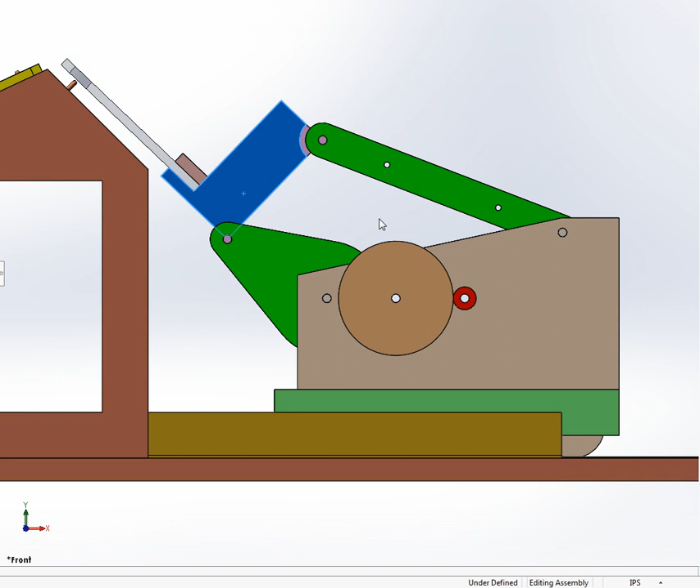So we're going to talk about how to create this. Again, you're going to create your own concept. It doesn't have to look like this. But you'll notice that this one does have a two-stage reduction here. And if you had one motor on this side, then you need to have an axle going across to drive the pinion on the low torque side on both sides.

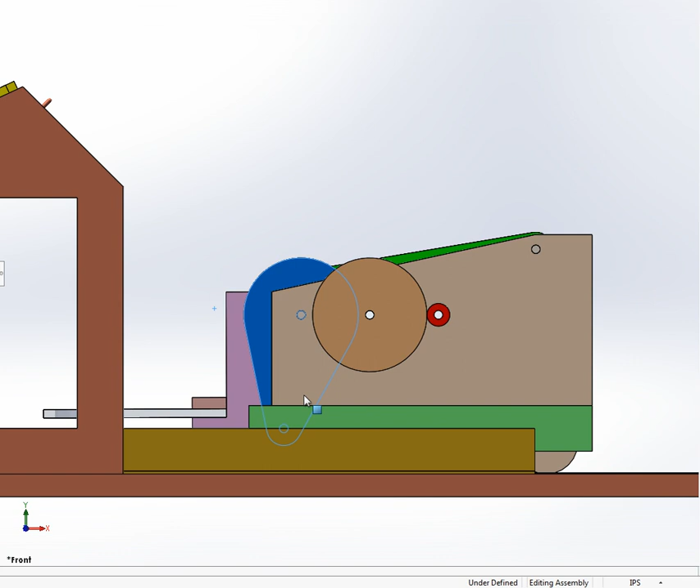Or you can see there's a lot of room in here, even when this is down in this position, so you can see that there's still quite a bit of clearance in there. If you wanted to put a brace, stiffen these two arms up structurally, then you could just drive the motor on one side. That'll be up to you, or use a different way.

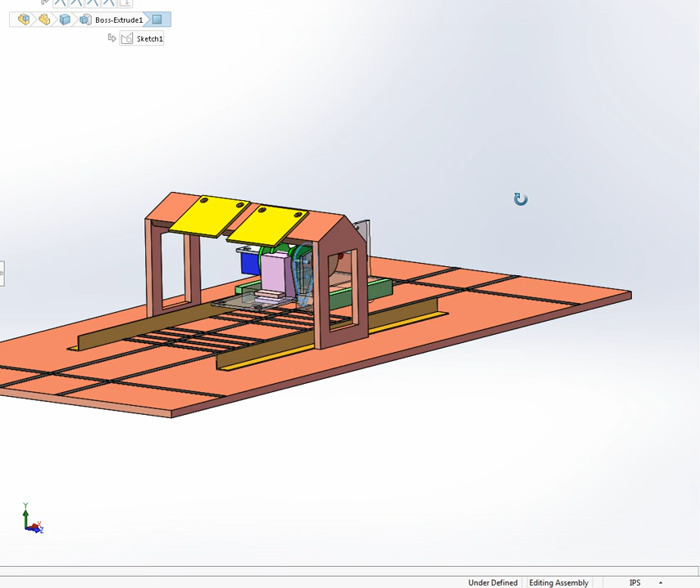But one of the things that will be required in this project is that you only use 4 actuators. So you can use 2 actuators to drive each side of the base, or 1 actuator for each side. And then you can use an actuator to drive the 4-bar and an actuator to drive the grabbing mechanism. So you have to carefully design the 4-bar, because you're not going to have another actuator to, say, tilt the jaw separately.

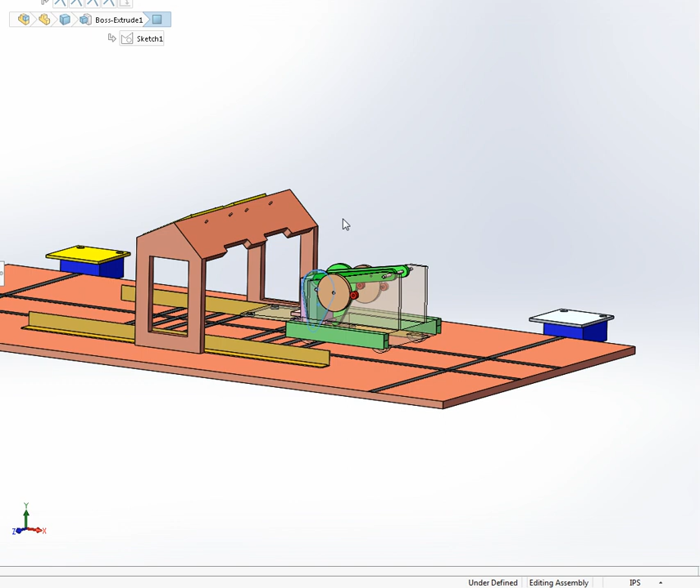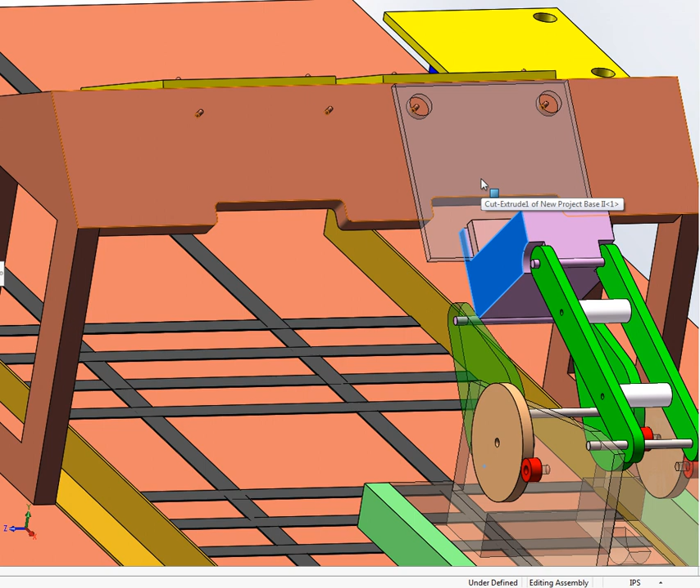You also notice that there are these tabs just to give you a little extra room in here, right? So there's enough on the edge here to catch the plate so it doesn't fall off, but where your jaw is actually interacting, if you want to have a bigger jaw, there'll be room in there. So now the other side is a little bit trickier.

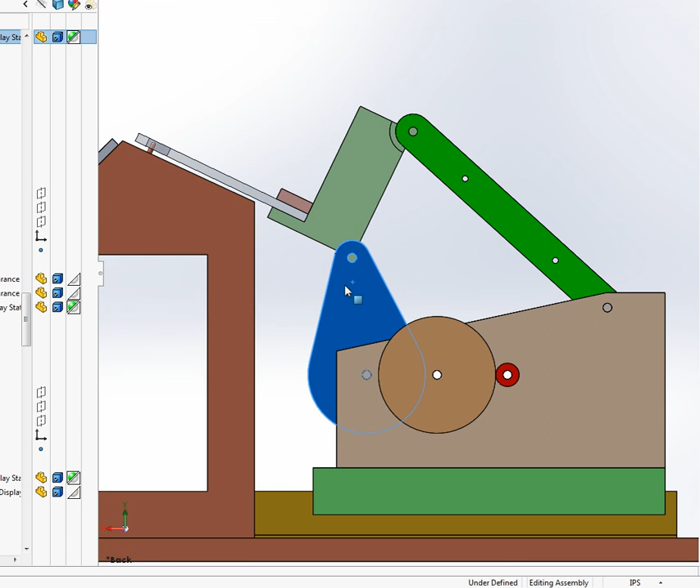Okay, so this is on the other side. You can see that the angle starts out at 0 degrees. In this position, the 4-bar has to be at 45, and then by the time you get up to here, it needs to be at 25 degrees. So to raise that top, you have to go forward a bit. So this is a little tricky. This is the hole right here, right? So you have to have this up high enough, but at the same time you can't hit down here.

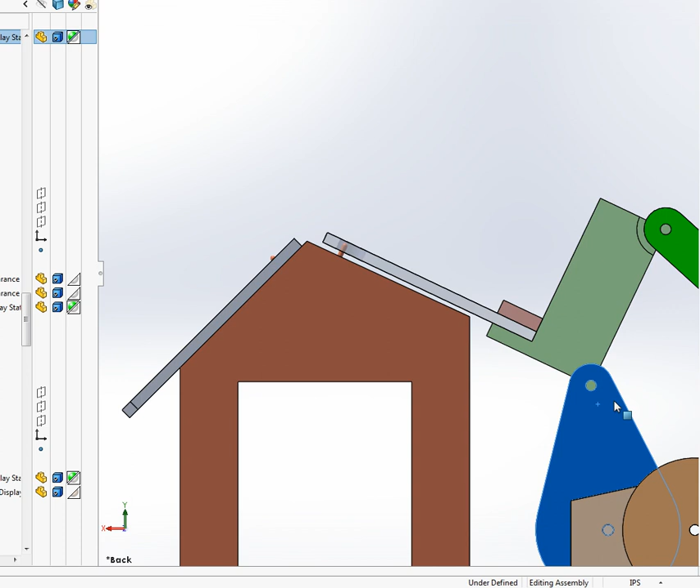And then as you lower this section, if you use these positions, there's lots of different positions that this can work. So as you start to drop it, you might actually have to move the robot forward a little bit. Okay, so you can see it moved the robot forward a bit, and then you can drop it.

And at this point, again, if you have this jaw, either it drops, or if you had this on some kind of slide, so this part is fixed and this drops, then you'll be able to back up. The same thing as you approach it to pick it up, you're going to have to be able to lift it off. As you pick this up, you're going to have to back up a little bit. So as you back up, you can move this up, and now you have enough room to clear that point to pull that off.

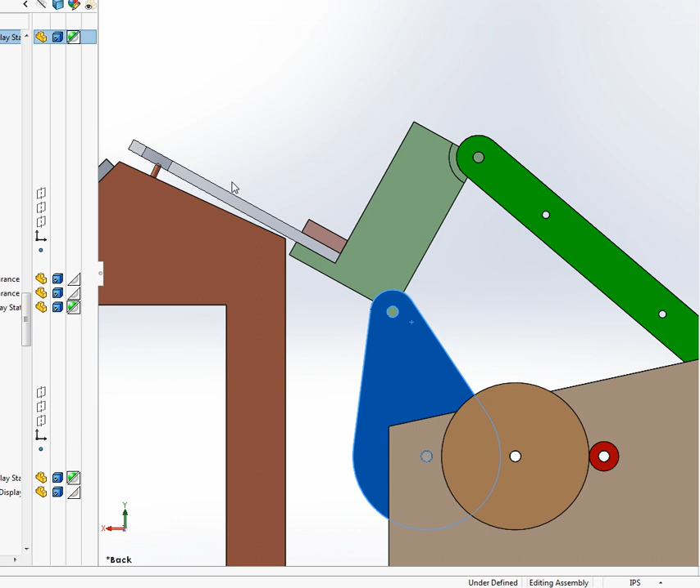It's a little bit easier, as I said, on the other side. So on the other side with the 45-degree angle, you can come up, grab it, lock the jaw, and then just pick it right up. It's pretty easy on that side. So I'll pick up here from the next video.